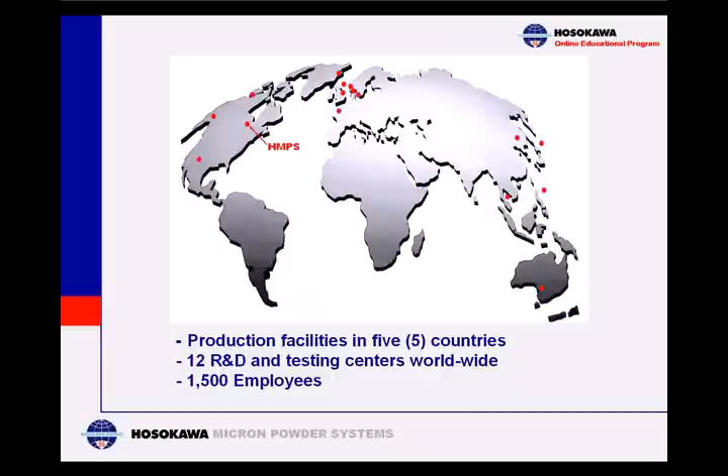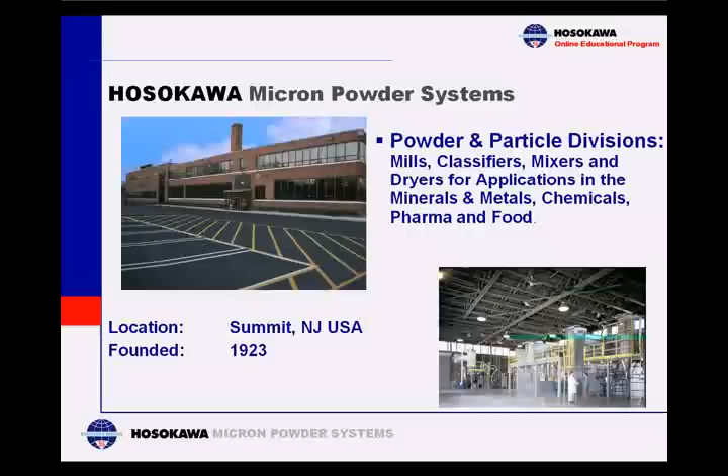Hosokawa Micron Powder Systems is a division of Hosokawa Micron Group with headquarters in Osaka, Japan. We are the global leader in powder processing equipment, employing 1,500 employees worldwide with production facilities in 5 countries and 12 research facilities and test centers. Hosokawa Micron Powder Systems is North America's division, supplying products and services in the chemical, mineral, food, and pharmaceutical markets. Our brand names include Mikro, Alpine, Micron, Nauta, Majac, Stott, Vitalair, and Hosokawa Bepex. Hosokawa is the global leader of powder and particle processing solutions for size reduction, classification, mixing, and drying applications. Our division was founded in 1923 under the name Pulverizing Machinery. We are located in Summit, New Jersey, and have been part of the Hosokawa Micron Group for 23 years.

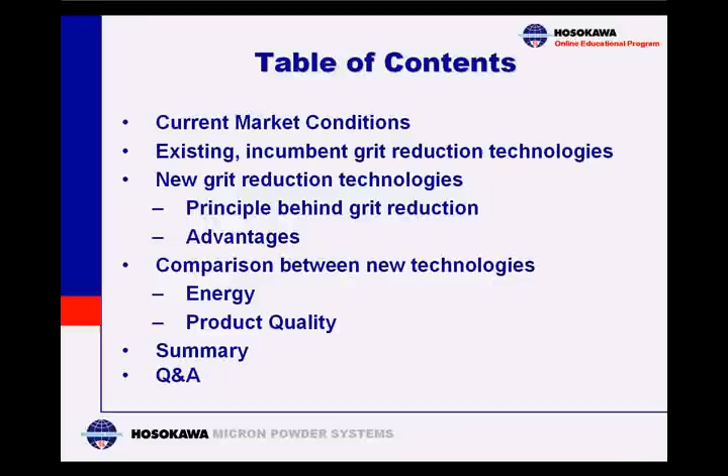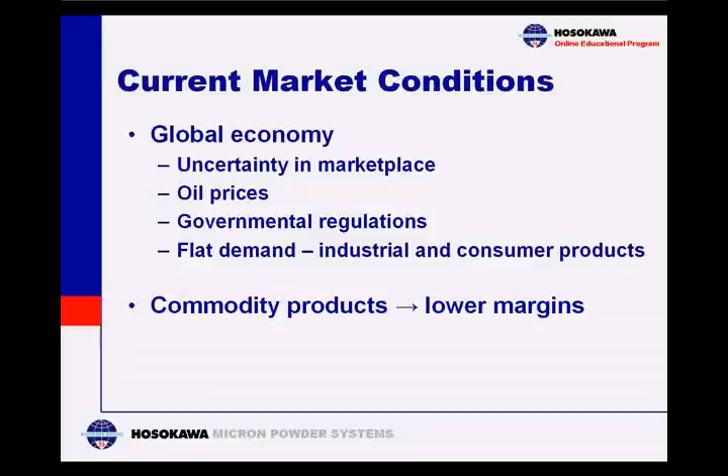It is becoming more difficult for carbon black manufacturers to compete in the market with a stable of commodity products. Recent global economic concerns, continued uncertainty in the marketplace for industrial and consumer products, fluctuating oil prices, combined with governmental and environmental regulations, are all contributing to increased production costs. Global demand for rubber products is slowly emerging from record lows. China and India are the only two emerging markets, while others are still suffering from drastic reductions. All of these factors are contributing to eroding revenues and product profit margins.

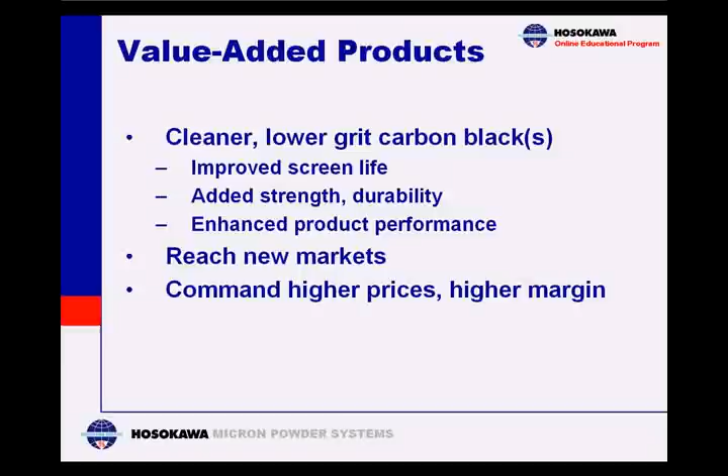Perhaps one way to emerge from the dilemma of low-profit commodity manufacturing may be to seek new or emerging markets with value-added niche products. In the case of carbon black, grit or residue control is one important quality parameter by which the value of a product is measured. If a manufacturer could develop a method to produce cleaner, near grit-free carbon blacks, then it could perhaps target these alternative markets by offering products that may add strength, durability, and enhanced product performance. The manufacturer could thus command higher prices, generating more revenue and higher profit margins.

Before I touch on these new milling technologies, let me first begin by reviewing the incumbent technologies for which most of you, I am sure, are familiar with. Perhaps the mill that's been around the longest in the carbon black industry is the hammer and screen mill, i.e. the pulverizer. Here are some facts and features.

This is a mechanical impact mill. It utilizes a static screen to control residence time and hence the particle size distribution of the product. Inside we have a series of hammers rotating at a specified speed, upwards of about 21,000 feet per minute.

Some advantages include the fact that this hammer and screen mill can be installed in line, from the reactor bag filters to the final packaging line. It can be installed in between. In addition, this mill is relatively inexpensive, not only from a capital cost perspective, but from an operating and maintenance cost perspective.

However, there are quite a number of disadvantages for a machine like this. First of all, the screen is susceptible to breakage. Any sort of tramp material or overloading of the mill could result in breaking of the screen, thus destroying the quality of your end product. In addition, even though the tip speeds are relatively high for a machine like this, it does provide or manufacture very coarse grades of carbon black with respect to some of the newer technologies out there.

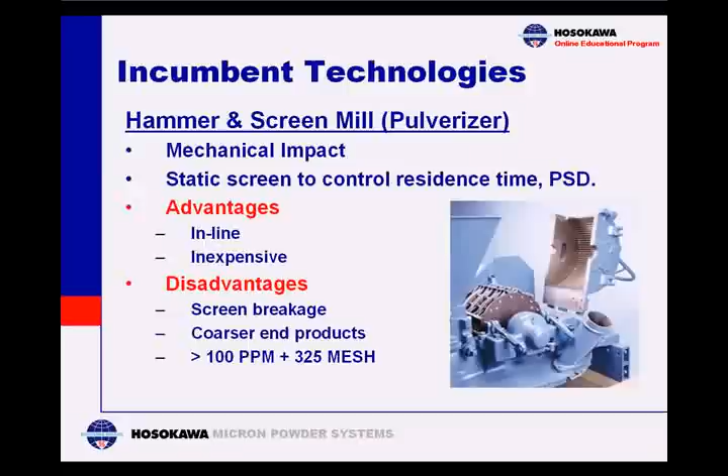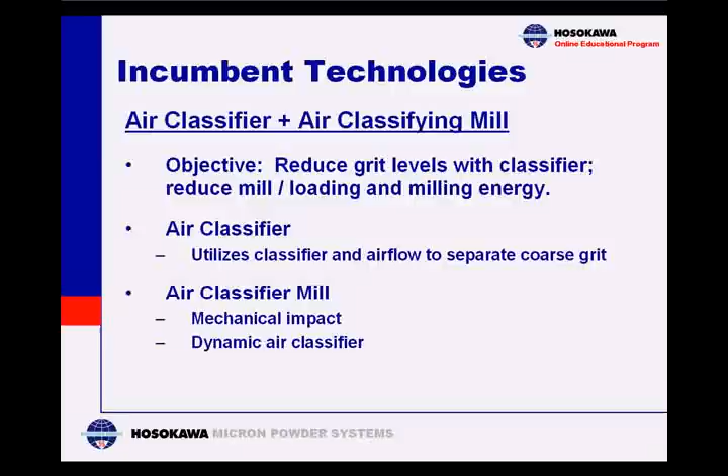Another technology uses an air classifier in conjunction with an air classifying mill. These systems are most common in Asia. The idea is to incorporate an independent separation system, removing a portion of the coarse fraction to reduce loading on a downstream mill or grinder. The air classifier utilizes a dynamic classifier to control particle size cut point by adjustment of classifier speed and airflow. The air classifying mill reduces grit particle size by mechanical impact. Inside the grinding chamber is a dynamic air classifier controlling residence time and hence particle size.

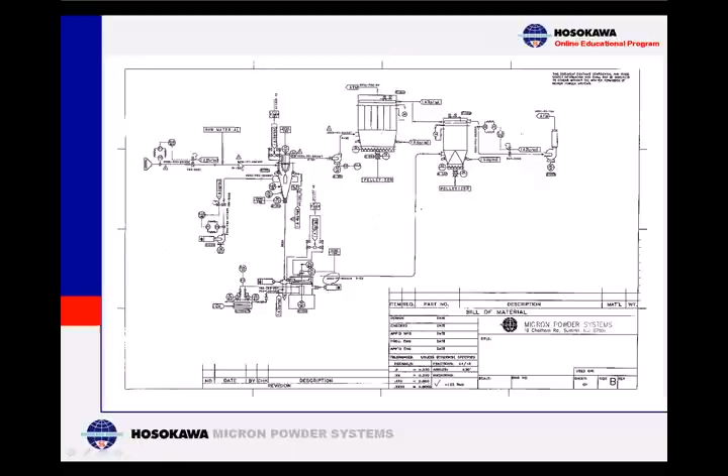Upstream would be the reactor bag filters or product collectors. The material would be pneumatically conveyed, then dropped by gravity into a pneumatic line feeding this air classifier. The air classifier also utilizes a secondary air inlet, so there are two air inlets: the primary used in conjunction with the feed material, and the secondary air inlet.

The coarse particles rejected by the classifier are dropped or discharged by gravity through a rotary airlock, feeding the air classifying mill. The fine particles, without the grit, are conveyed pneumatically from the classifier to a primary bag filter, from which point on it's bagged or pelletized.

Going back to the air classifying milling system, in comparing this technology with a hammer and screen mill, or an air classifier mill not utilizing an air classifier upstream, the idea is to minimize the overall size of the air classifying mill, hence the kilowatts or installed horsepower in the system.

However, despite the fact that there could be a reduction in energy required for the milling portion, keep in mind that having two independent convey systems adds significantly to the amount of capital equipment, as well as the capital cost and energy cost of the overall system.

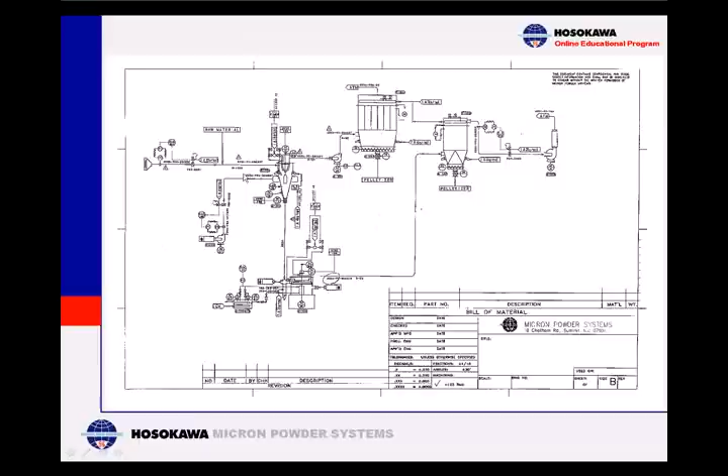Discussing advantages and disadvantages of an air classifier plus air classifying mill: advantages include reduced loading on the ACM, hence reduced grinding energy, or a smaller air classifying mill. This unit is offline, therefore it could be a flexible system, allowing lower process temperatures. Disadvantages include much higher capital cost, and higher energy and operating cost per ton of product—in certain cases 2 to 3 times that of other technologies—as well as higher grit levels and coarser end products compared to newer technologies.

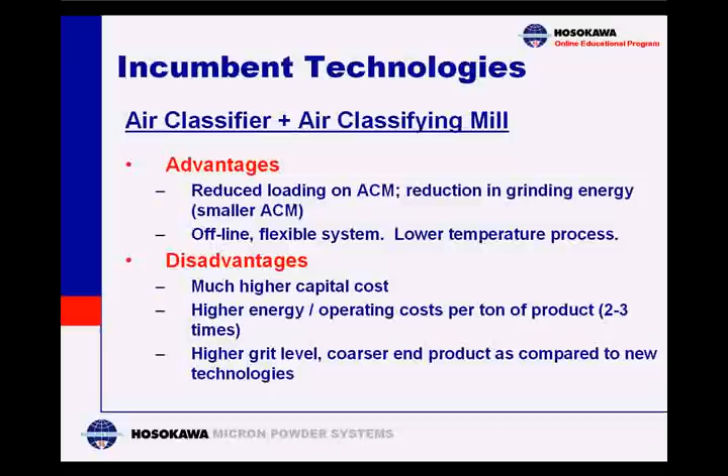There is indeed a way to manufacture cleaner, near grit-free carbon blacks with comparatively little capital investment. There are two types of grinding mills recently developed for superior grit reduction: the vertical long gap mill and the enhanced air classifying mill. These mills have been optimized over recent years to provide unparalleled grit and residue control, as well as excellent dispersion properties for most grades of carbon black.

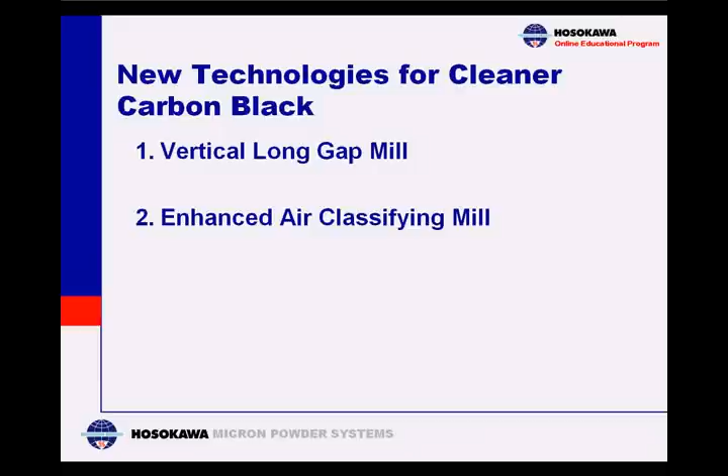Shown here is the vertical long gap mill. The mechanism behind it includes rotor tip speeds, or hammer tip speeds, of about 115 meters per second, or about 23,000 feet per minute—very close in velocity to the hammer and screen mill. However, what separates this mill from other milling technologies for carbon black is the stressing mechanisms employed. The incumbent technologies, such as the hammer and screen mill or an air classifying mill, utilize mostly mechanical impact.

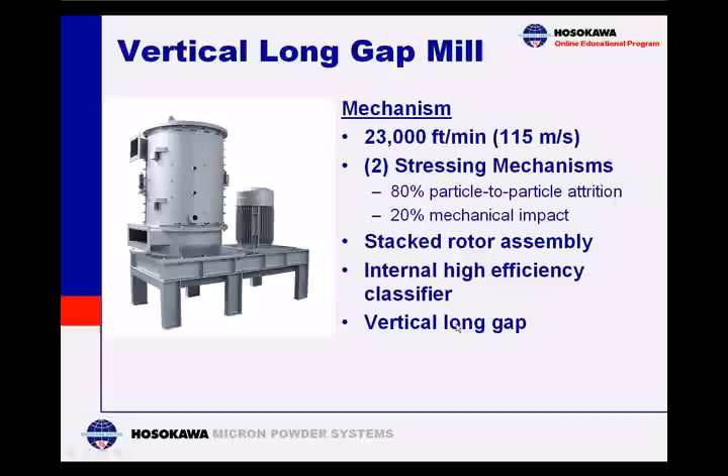The vertical long gap mill, however, utilizes 80% particle-upon-particle collisions or attrition to reduce the particles, and only 20% mechanical impact. There's a noticeable difference in stressing mechanisms compared to the mechanical impact mill. This mill utilizes a stacked rotor assembly as well as an internal high efficiency classifier, and hence a vertical long gap, which I'll show in a following slide.

What we're showing here in these two photos: on the left, this high efficiency classifier mounted on top of the rotor stack assembly. Here you can see multiple stacks of rotors and the different levels of hammer plates. On the right, we have the door open, showing the multiple deflector liner around the hammer or rotor section. Between the hammer plates and the liner, there's a very tight clearance, in the range of 3 to 5 millimeters. Hence the term vertical long gap.

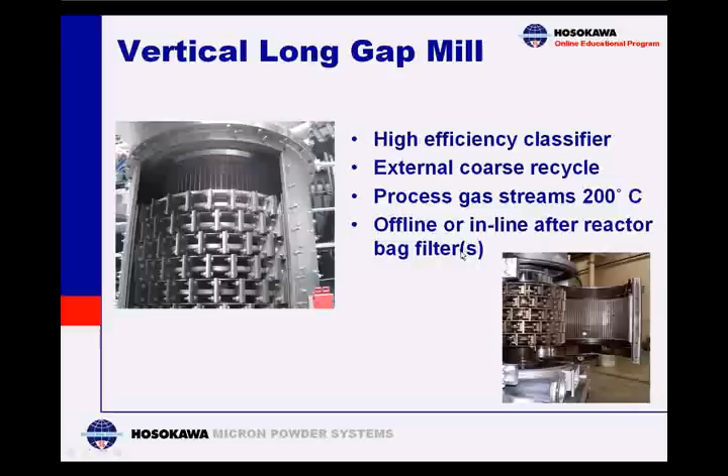Some other facts and features of this technology: this mill can be installed in lines utilizing process gas streams of upwards of 200 degrees Celsius. In addition, this vertical long gap mill can be installed offline or even inline after the reactor bag filters.

Now, what happens behind each of these hammer plates is, as the hammer plates rotate past this serrated liner, you have a series of vortices behind them, and these vortices are where the particles collide with each other. That gives excellent grinding efficiency compared to other milling technologies.

Ultimately the particles are conveyed up. They get caught behind these vortices but work their way up this fine gap, or vertical long gap, until they're presented to this high efficiency air classifier. The particles that are fine enough are removed through the air classifier and conveyed downstream through a material handling fan to a product collector. The materials that are too coarse, the grit particles, are rejected by this classifier.

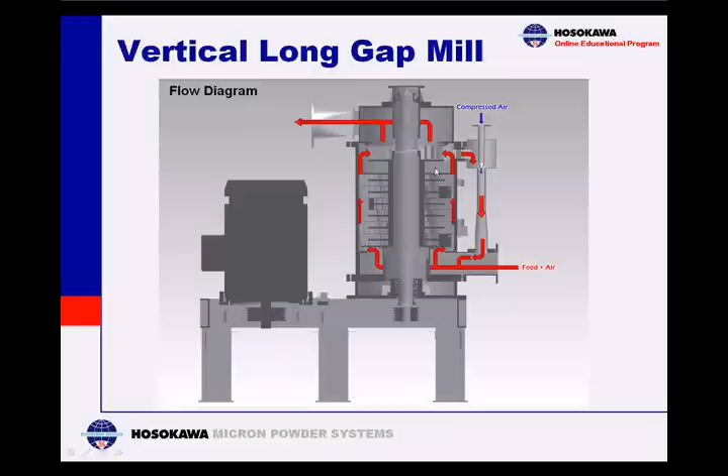So comparing this to, for example, an air classifying mill which utilizes an internal recycle, the vertical long gap mill utilizes an external recycle loop, such that once the particles are ground fine enough, they are finally accepted through the classifier and collected into the final product bag filter.

Another technology I'd like to discuss for superior grit removal includes the enhanced air classifying mill. Similar mechanisms are employed here compared to the vertical long gap mill. First, tip speeds are similar, in the range of 115 meters per second, or 23,000 feet per minute. However, the stressing mechanisms are different than the vertical long gap mill: about 80% of the stressing mechanism is due to mechanical impact and 20% from particle upon particle collision.

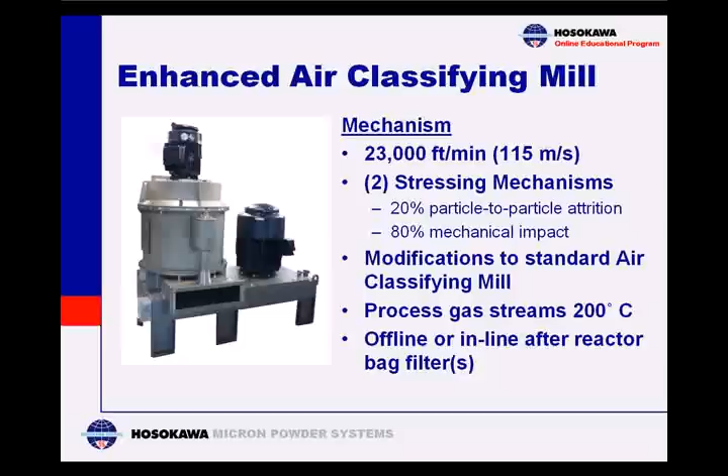Please note that there have been some modifications to a standard air classifying mill specifically for carbon black. As with the vertical long gap mill, this type of technology can handle process streams of upwards of 200 degrees Celsius and can be installed offline or inline after the reactor bag filters.

Here's a flow diagram of an enhanced air classifying mill. Similar to that of the vertical long gap mill, the feed material, or feed carbon black, mixed with air, is conveyed pneumatically into the bottom of the grinding chamber.

The feed material and air are introduced from below the rotor disc. Shown here is a rotor disc with a series of hammer plates - just one stack or one row, in comparison to multiple stacks for the vertical long gap mill. The particles are introduced below the rotor, giving all particles a chance to pass through the grinding zone.

Given the fact that the carbon black has a very low bulk density, we want to ensure that we are passing through the grinding zone prior to introduction to the classification zone.

So the particles are passed through the grinding zone and are introduced to the classifier. Shown here is a dynamic air classifier, a high efficiency classifier. The particles that are fine enough are removed through the classifier, and from then on are conveyed through a material handling fan and then finally a product filter.

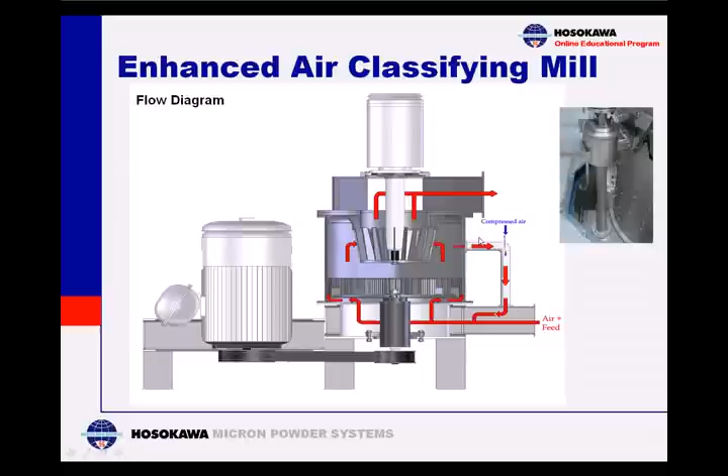The particles that are too coarse are drawn out centrifugally, helped out with the addition of a venturi, similar to the vertical long gap mill, at a specified pressure and a gate. All these parameters affect the recirculation. So the coarse particles are rejected and are recirculated externally, similar to that of a vertical long gap mill, yet different from a typical air classifying mill.

As I will highlight later in this presentation, not all grades of carbon black process similarly. Rates and product quality vary from grade to grade. In order to define product and process performance, pilot testing is a must.

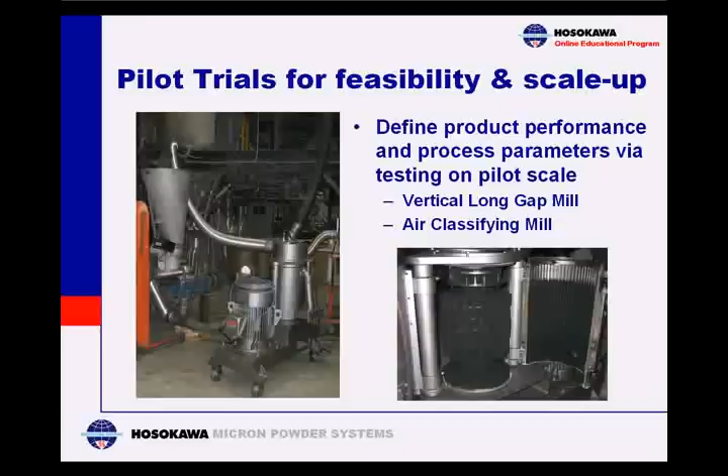End product quality and production capacity can be determined from trials. Process data such as airflows, pressures, and power consumption dictate sizing of ancillary equipment, such as material handling fans, bag filters, rotary airlocks, as well as utilities.

What I'm showing here is a typical pilot plant setup or process for either a vertical long gap mill or an enhanced air classifying mill. On a pilot scale setup, since this cannot be simulated in line at a customer's facility, this is an offline process. So in this case, we're metering the feed material in utilizing a volumetric screw feeder, then conveying it into the grit reduction mill, albeit a vertical long gap mill or an air classifying mill enhanced version.

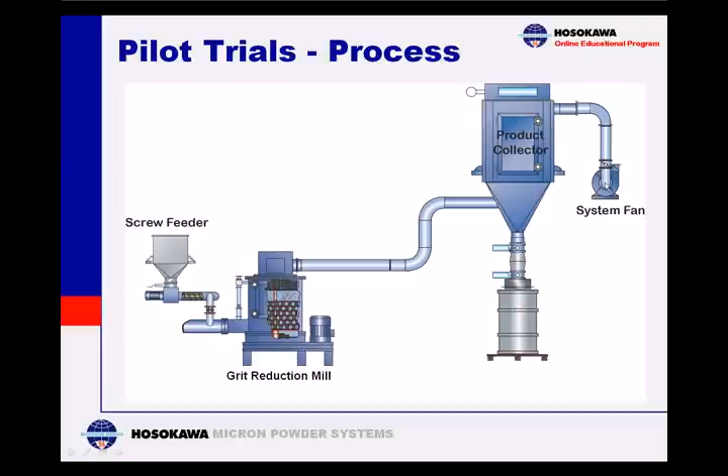The grinding is taking place here and then pneumatically conveyed to a product collector. Here the product passes through a discharge valve or set of valves. Unlike a typical inline process, instead of having a material handling fan located between the grinder and the product collector, we have a fan downstream of the product collector pulling vacuum.

Shown here is a chart comparing results of a vertical long gap mill to an enhanced air classifying mill for varying grades of carbon black. What I'm showing here are 4 different grades of carbon black, and the quality measure in this case would be grit levels on a ppm scale, plus 325 mesh and plus 500 mesh, utilizing a water wash residue test.

What I'd like to point out here is how much better on average, or how superior, the quality of the product is for a vertical long gap mill, even in comparison to the enhanced air classifying mill.

For example, for grade 1 with a feed of 250 ppm plus 325 mesh and 400 ppm plus 500 mesh, the vertical long gap mill can make a product with either 0 or 1 ppm plus 325, or 0, 1, or even perhaps as much as 2 ppm on 500 mesh.

With that same feed material, the enhanced air classifying mill can make a similar product with respect to the plus 325 mesh, being 0s or 1s. However, please refer to this data here. Utilizing an enhanced air classifying mill, we can achieve qualities in the range of less than 10 ppm on 500 mesh, in comparison to less than or equal to 2 ppm.

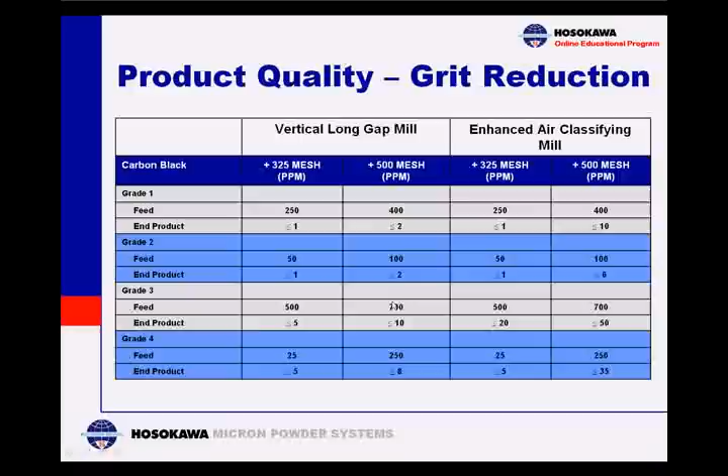Going down the list here, you can see how the results compare. But the trending is obvious - the vertical long gap mill, especially when comparing or looking at the plus 500 mesh, provides a much superior product quality to even that of the enhanced air classifying mill.

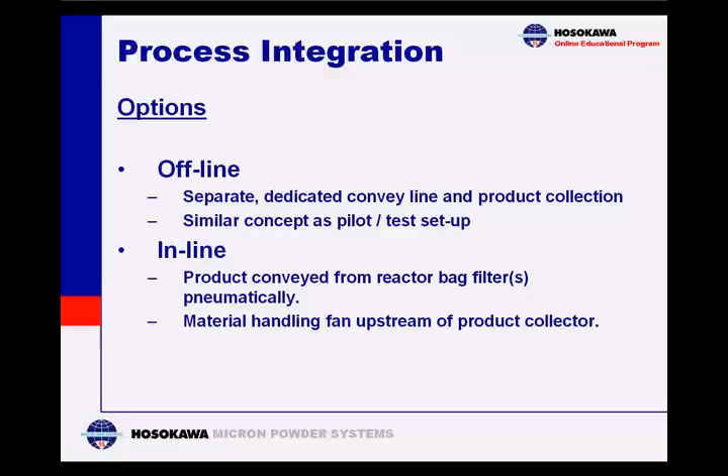There are two ways the process can be implemented, either offline or inline. For offline systems, the mill is separated from the pneumatic line, from the reactor bag filters to the primary bag filter. Aside from the fact that the system can be operated at ambient temperatures and not at elevated temperatures as found at the outlet of the reactor bag filters, the feed rate to airflow ratio can be controlled.

Shown here is an inline process integration, utilizing or employing either a vertical long gap mill or enhanced air classifying mill. In the existing carbon black process, we have the reactor bag filters, typically multiple filters discharging through valves to a common convey point. From there, the product is conveyed, either utilizing a hammer and screen mill or nothing, from the reactor bag filters to the primary bag filter where the material is then packaged.

However, either mill can be installed in line. So what we have modified or retrofitted is cutting the pipe essentially from the discharge of the reactor bag filters to the inlet of the primary bag filter, and installing a new pneumatic convey line, followed by one of the grit reduction mills.

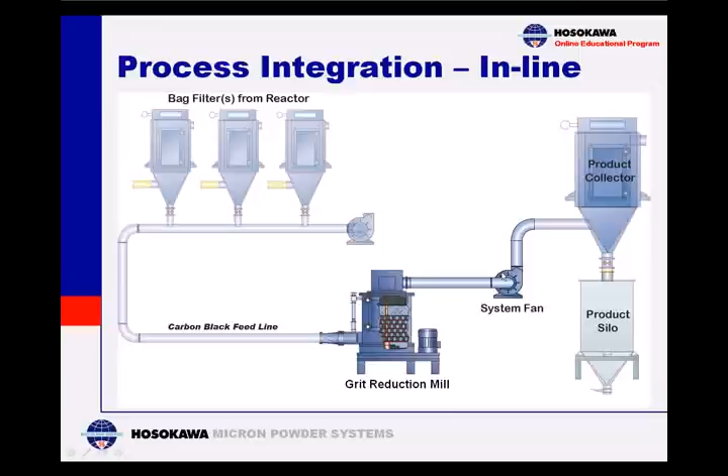Downstream of the grit reduction mill, due to the increased pressure drop caused by the loss across the mill, we need to compensate for that additional pressure loss by installing a material handling fan to drive it via positive pressure from this point to the product collector.

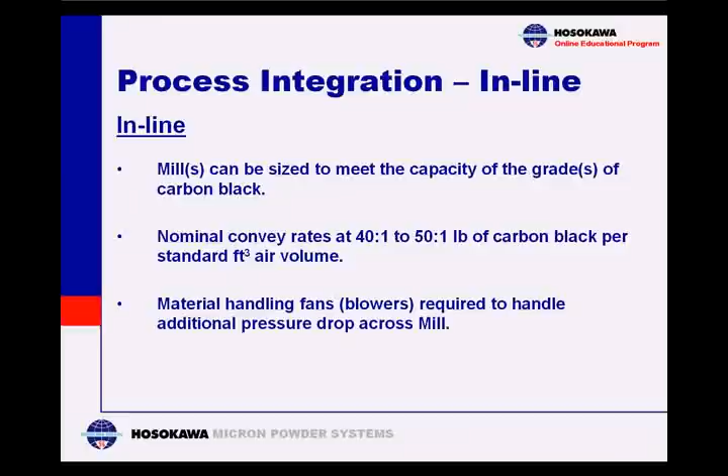Here are some facts regarding the inline process integration. Mills can be sized to meet the capacity of the grade or grades of carbon black. Nominal convey rates of 40 to 1 or 50 to 1 pounds of carbon black per standard cubic foot of air volume are typically utilized. In addition, material handling fans or blowers are required to handle the additional pressure drop across these mills.

Pressure drop varies with process conditions, and these pressure drops can be determined from pilot testing. Pressure drop across a vertical long gap mill is, on average, higher than that of an enhanced air classifying mill. As such, a higher energy requirement for a vertical long gap mill is realized, however, with much better performance, that is, better product quality.

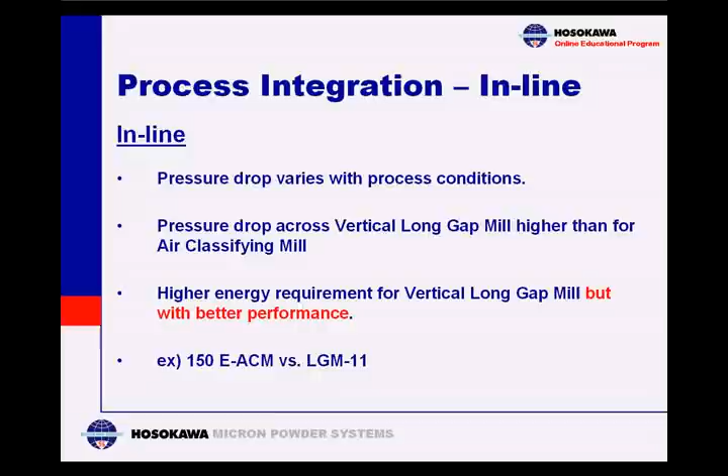I'd like to show you this example. In this case, I'm comparing a 150 horsepower enhanced air classifying mill to a 300 horsepower vertical long gap mill.

So, taking into account the additional static pressure requirement, the actual blower size is much higher for the vertical long gap mill. In this case, a 165 kilowatt motor for the blower as compared to a 110 kilowatt motor.

In comparing the overall energy required, or installed horsepower/kilowatts, for an enhanced air classifying mill as compared to the vertical long gap mill, looking at the unit energy at 4.5 and 5 tons per hour, please note the energy requirement is about 50% higher for a vertical long gap mill than for an enhanced air classifying mill. That is, 53 kilowatt hours per ton versus 78 kilowatt hours per ton.

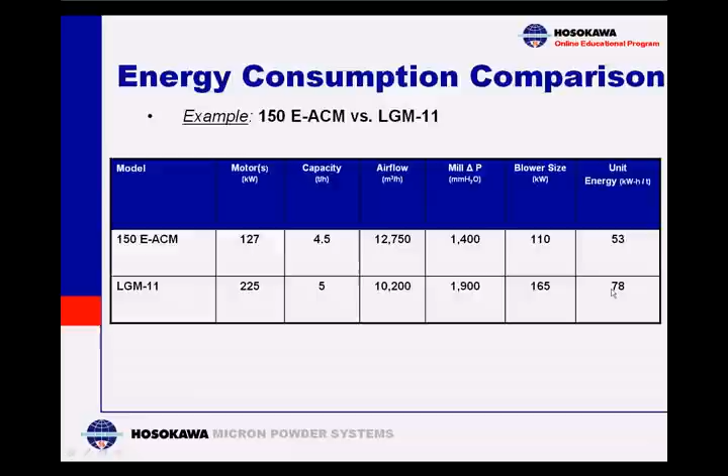In conclusion, the vertical long gap mill makes the cleanest, best quality product. However, despite the fact that the enhanced air classifying mill produces a slightly subpar product in comparison to the vertical long gap mill, it does significantly outperform other existing technologies, achieving lower grit levels than existing or incumbent milling technologies. Both mills can be retrofitted inline in existing processes.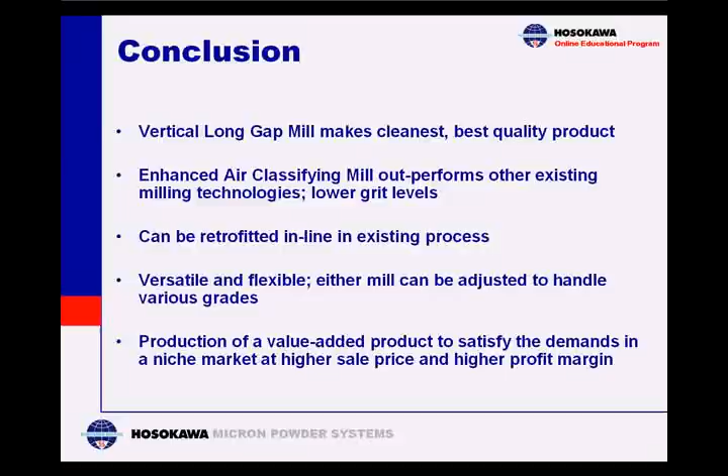These machines are versatile and flexible. Either mill can be adjusted to handle varying grades of carbon black, enabling production of a value-added product to satisfy demands in a niche market at a higher sale price, and thus a higher profit margin.

Thank you very much for your time and attention.